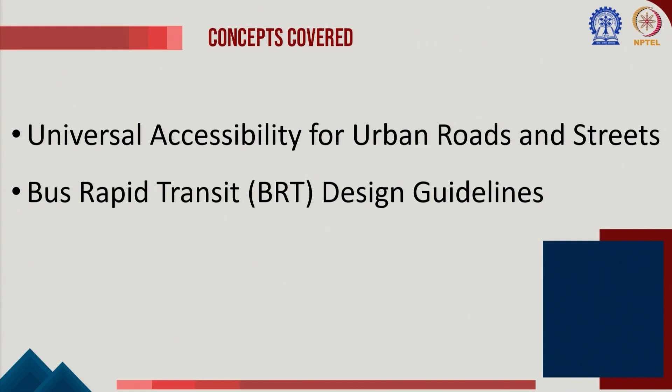Universal accessibility for urban roads and streets will be the first topic covered, followed by the general design guidelines for bus rapid transit, or BRT.

What are the barriers to public transport? Why are people, particularly those with vulnerability, sometimes scared of availing public transport? If we want to make the public transport system accessible, safe and inclusive, we have to understand the different categories of barriers, particularly to the transportation system.

There are certain spatial barriers which include the distance to be covered. If it is too much of a distance, involving a long travel time, then people are more reluctant to use public transport system.

Or if the nearest stop or place from where you can access the public transport is too far from someone's house, such that they have to travel a lot to access that system, that might also be a deterrent. We now talk about this endpoint connectivity, last mile connectivity.

What does that mean? That means it has to be accessible from the origin to the destination.

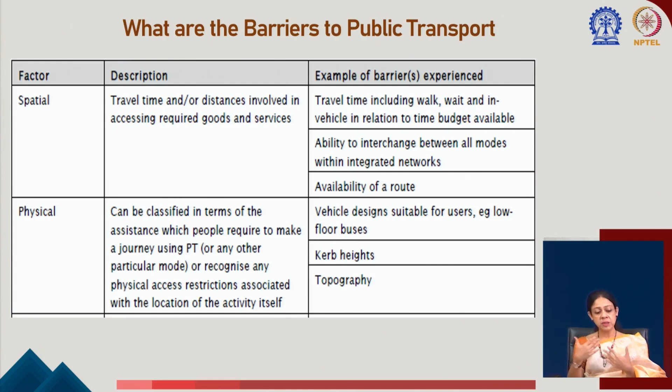Next will be the physical problems. The vehicle design needs to be suitable for someone with physical or sensory vulnerability, like low floor buses or tactile signage. These are the physical barriers, physical restrictions.

Next there might be temporal problems. What are the temporal problems? Non-availability of transport system in certain hours, frequency is a problem, meaning reliability is sometimes an issue, too much waiting time, and scheduling. So these are certain temporal barriers — there may be a mismatch between the time when a service is desired and when it is available.

Next you have the financial barriers, that is the affordability part. The travel cost may be too high; those modes of public transport which are relatively safer and more accessible are not very affordable. So that is a financial barrier.

There might be some environmental barrier, such that it might not be comfortable. The waiting area might not be comfortable, there might not be adequate street lighting, leading to safety and security related issues. There might be a dark patch when you get down from one transport system and move to another. So these are certain environmental barriers related to the quality of facilities.

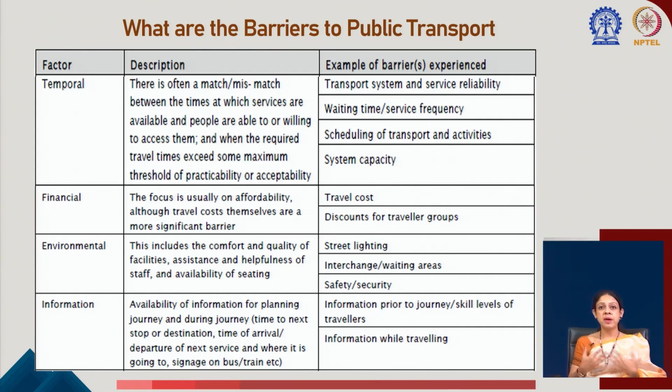Next, information. When we travel from one place to another, the problem doesn't only start when we board a vehicle, but actually before that — when we start planning, when we start getting information, say when booking a train ticket, or wanting to know the frequency of a bus or the bus routes. If that information is not accessible, that leads to problems. Or when someone is waiting at a bus stop, they need to know which buses will be coming there, and whether they are standing in the right place to board the right bus. So these are certain problems related to information.

To summarize, components of accessible public transport are: getting to the service by self, by walking or by wheelchair; getting to the service by car, meaning someone should be able to park and easily transfer to the stop; and waiting for the service, meaning the bus stop, shelter, or train station needs to be accessible.

Then being on board, be it a bus or train, what are the facilities available there - whether it's the vehicle design part or the station and stoppage design part. So both need to be accessible.

Also while being on board, what services are extended there - like how would a person with sensory impairment, a person with vision disability, know that a stop is approaching, or if there is an announcement that the next station is this and the door opens on the left, how would a person who cannot hear be aware? So going back to universal design principles, dissemination of information should be in different forms.

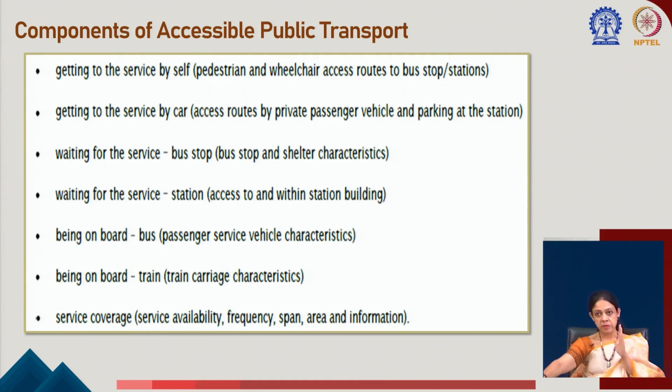This is a comprehensive approach. There are three critical parts of a journey. When we talk about accessibility, there should be seamless accessibility - a point of origin and a point of destination. There should be seamless, uninterrupted accessibility from the point of origin to the destination, from home to office, home to healthcare, or from one place to another. So there's connecting the route to the transit terminal - when you move from origin or destination to the public transport - and then the public transport part itself. These are the three critical parts of a journey, and one by one we will look into the accessibility requirements for each.

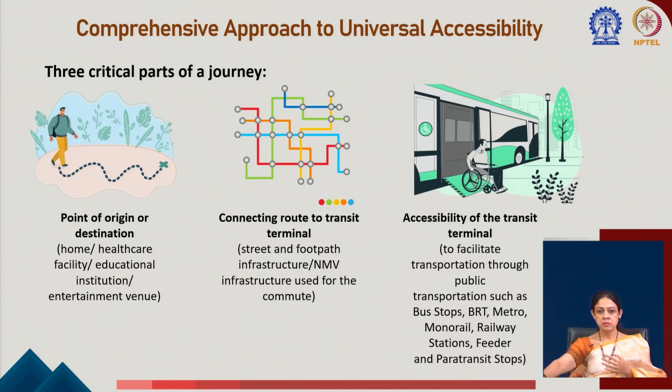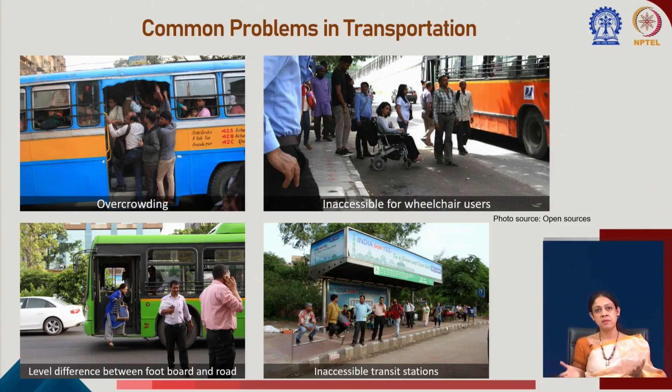These are very common scenes, common problems in transportation - an overcrowded bus, someone waiting on a wheelchair who cannot board, level differences between the footboard and the road when it is too high, and inaccessible bus stops with no seating, no proper lighting, forget braille signage and other things. This is a very common scene in many Indian cities. Things are definitely changing, but situations like this still exist.

Now why do we need universal accessible transit? If you remember what we discussed - individual benefit and community benefit - if someone can avail public transport, that reduces the cost of living because it's cheaper, and it increases his or her potential to participate in different activities including employment. That again goes to a community benefit. So these are the reasons why we need universal accessibility.

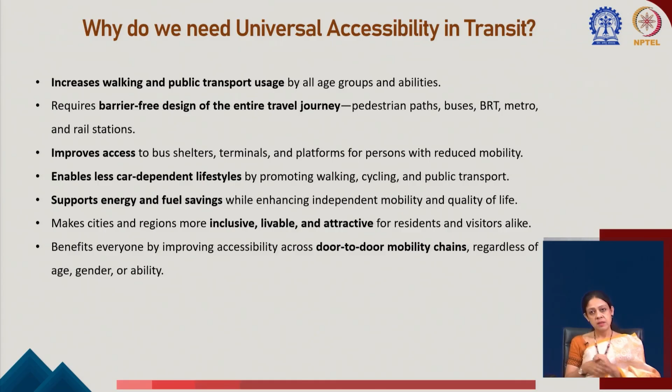Also from an environmental point of view, we know that the pollution created by traffic is quite high, and if we have good public transport systems, that means there will be less automobile dependency - less dependency on individual cars. This less car-dependent lifestyle will have a positive impact on the environmental scenario as well, and supports energy and fuel savings. So these are the overall benefits.

Now how do we achieve this? There are multiple stakeholders, and we need to involve all of them - service providers, planners, drivers and helpers of the transportation system, bus drivers, conductors, auto drivers, everyone. So not only is planning important, but awareness generation is also important. And what is important, as we have discussed, is accessibility audits and walkability audits. These are also important - only then can we have a holistic framework.

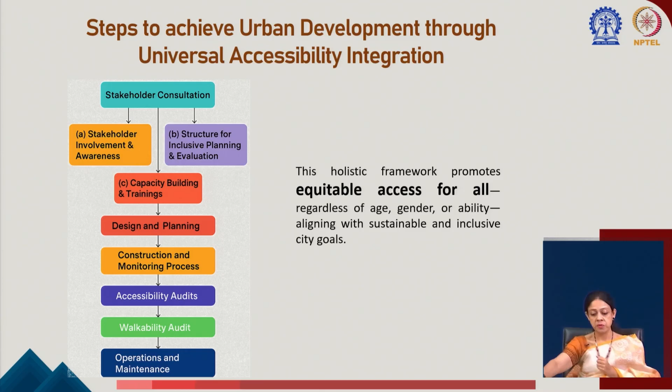Now let us take these one by one, starting with non-motorized transport. When we talk about non-motorized transport, we mean a significantly smaller route - mainly the portion of the travel chain when you go from the origin to the public transport, or from the public transport to your destination. This means it is either by walking, by cycles, or by wheelchairs.

If we talk about inclusive cycle tracks and non-motorized transport, we come back to the environmental aspect - cycles, tricycles, cycle rickshaws, push carts, these are all human-powered modes. In many of our cities, these tricycles, special cycles for people with disability, cycle rickshaws which are popular with the elderly to keep their pace, and push carts in tier 2 and tier 3 cities, are used for last mile connectivity.

All these human-powered modes - their safety is also important. Whenever we have a segregated lane for these non-motorized vehicles, physical separation is desirable, at least notional separation. Physical separation is very important for safety. A well-defined cycle track for non-motorized vehicles, properly separated with dividers or bollards from the vehicular road, is essential for inclusive non-motorized transportation and proper integration of these vehicle categories.

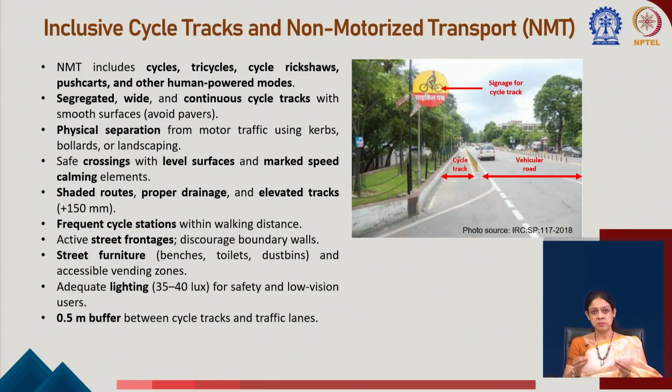This is a typical section of a cycle track, taken from the IRC. The sources are given, and these reading materials will also be provided to you, where we see a properly divided median track, a dedicated cycle lane, and a vehicular road with proper on-street parking. So everything is well defined, and there are also frequent access points with ramps.

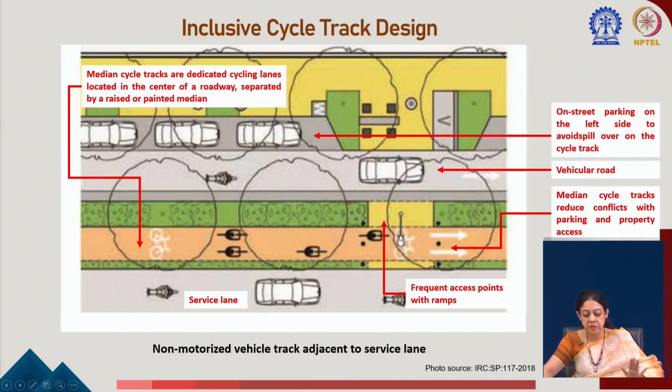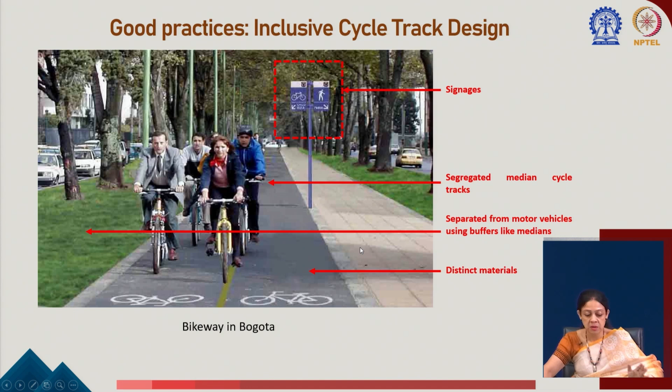Proper signage is a good practice - a distinct material to show which is a walking place and which is a cycling track. Now let us get into some motorized transit system.

To start with, inclusive bus stop design. In the bus stop, what do we do? We access the bus stop from the footpath or the road - let us try to imagine how we use it. Next, we need to access the vehicle, for which we require a smooth transfer from the stop to the vehicle.

So stage one is a smooth transfer from the footpath or road to the stop, then stop to the vehicle. Between these two, there's waiting time - if it's long, you're waiting a long time at the bus stop or terminal. While you wait, you avail information through different means - information on which bus is to come, and when it is to come.

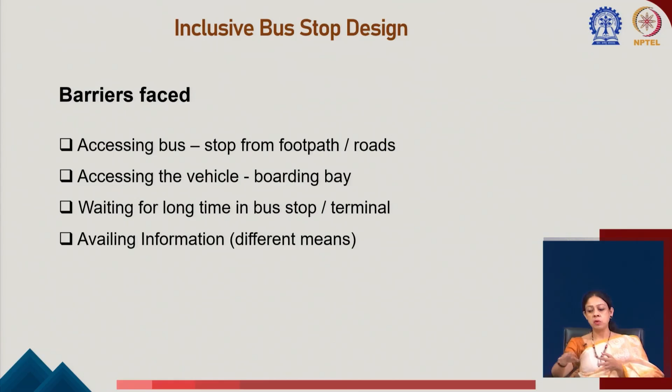So what are the solutions? When you access the bus stop from the footpath or road, level access is required. Where level access is not there, access to a ramp is needed, and curb ramps are required when there is a small difference.

For accessing the vehicle, there is the concept of a boarding bay which is at the level of the bus. For seating at the bus stop or terminal, there are priority seats. If someone is there with a wheelchair, then a square space of 1.2 meter by 1.2 meter is needed for placing the wheelchair.

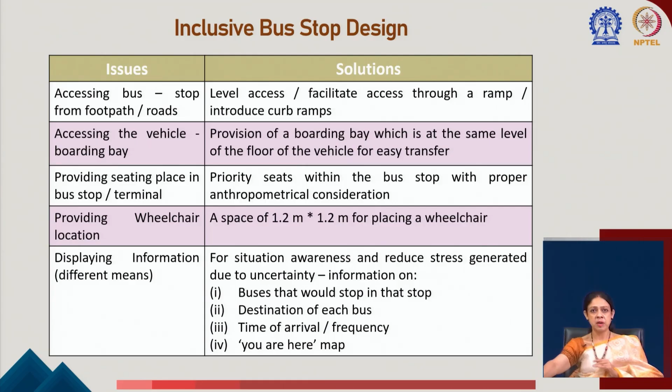Displaying information through different means is part of situation awareness - buses that will stop at that particular stop, destination of each bus, time of arrival, frequency, and maybe a 'you are here' map so that you can orient yourself to the surrounding.

I think the same thing I discussed is being mentioned here. Additionally, there should be anti-skid matte finish tiles, because many of these areas are vulnerable to getting wet from rain, so it needs to be safe from that point of view. Choice of material should avoid glazed vitrified tiles and granite or polished Kota stone, because they can really be dangerous. Also needed: tactile guidance, and shelter against sun and rain, with proper lighting.

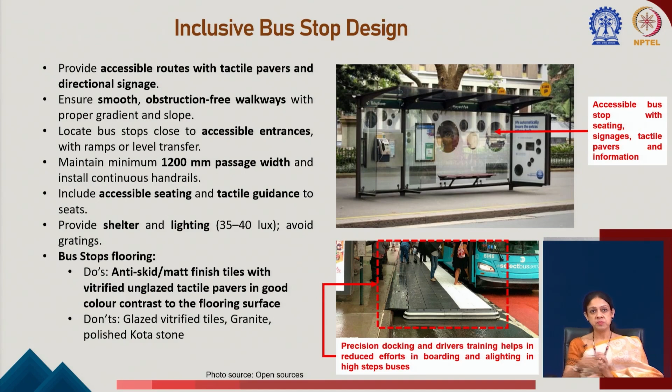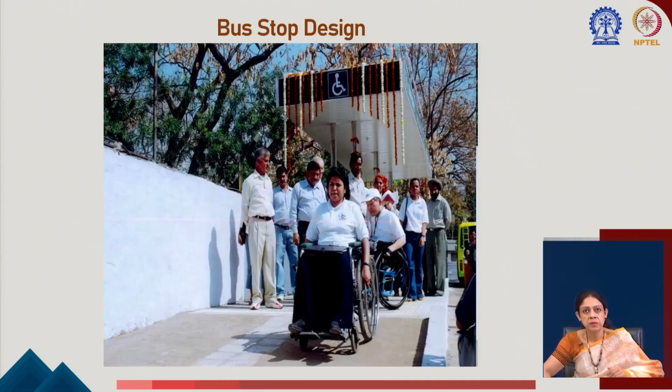Sorry, yeah. This is a design prototype which we had developed at IIT once, and I wanted to share that with you. So, what are the components here?

It is the proximity to the barrier free parking area, easy access from the parking area, from the barrier free parking with the help of the ramp to the bus stop. There are seating places, and there is a 1.2 meter by 1.2 meter area which is reserved for the wheelchair, and this is the boarding bay number 7, from where the bus can be accessed.

And this is a marking where the bus should also know where to stop, so that it can align itself to the boarding bay. So, this is the bus stop, and the suggestion was that some of the bus stops can have a universally accessible toilet along with a water dispenser, and also proper information with this information board. We have some views also, you will see. So, these were some of the components which were proposed in this prototype.

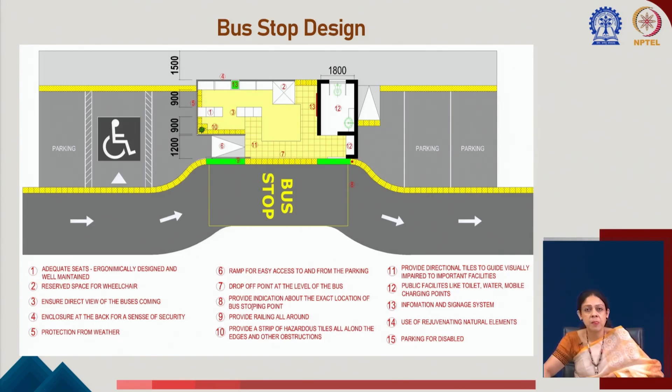Something like this, that this is the ramp, this is the signage system.

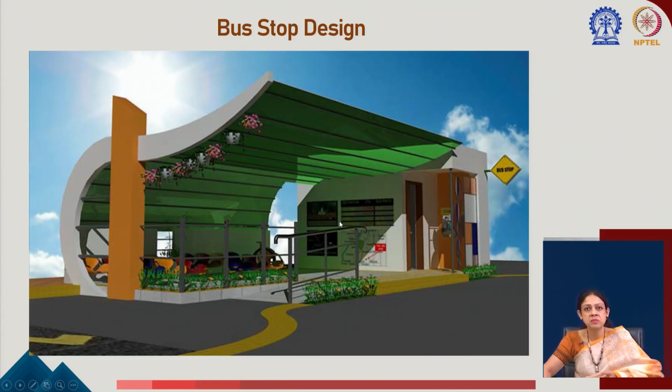This is also another very simple one, where you can see that these are the boarding bays, which are being marked by this directional and hazardous tile, and the rest of the areas have railings put, so that there is no dangerous situation.

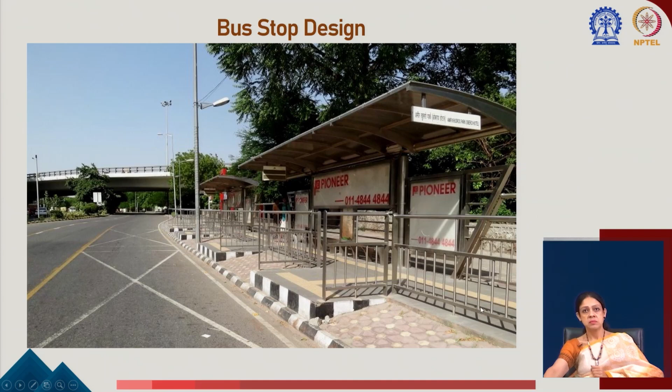Yes, as you can see, there is a very dedicated and clearly marked bus lane, where the bus should stop, because you need to synchronize things. You are having a boarding platform somewhere, and the bus is stopping somewhere else, then it doesn't make sense.

And also, you cannot expect the bus driver to see while driving the bus, where is your boarding platform. So, you have to mark a dedicated place on the road, from where it can be accessed.

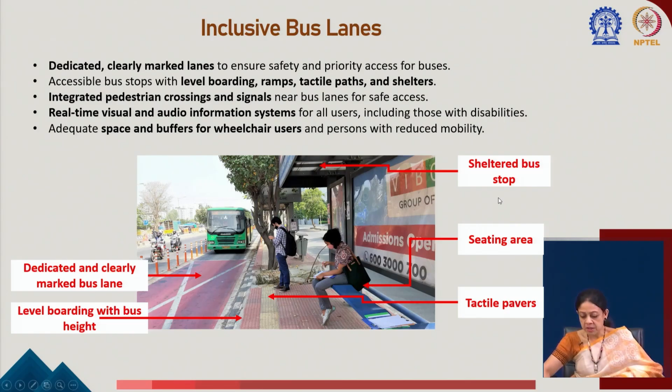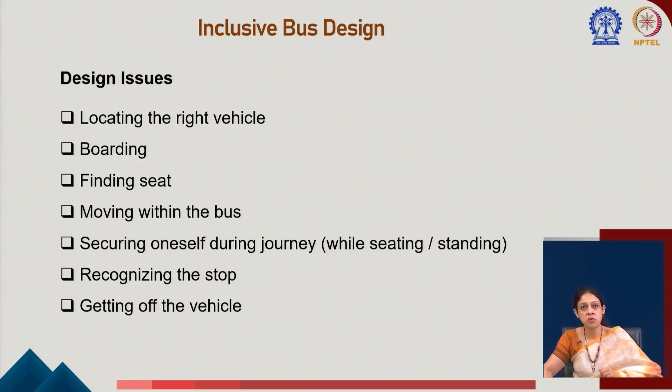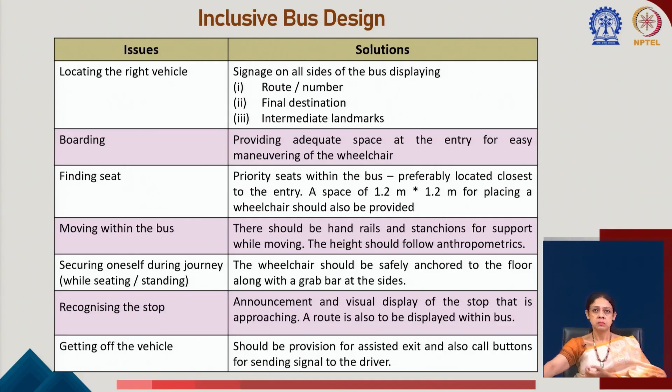Low floor entry, and additionally a ramp, space for wheelchair, sliding doors, wider doors. These are becoming more and more common.

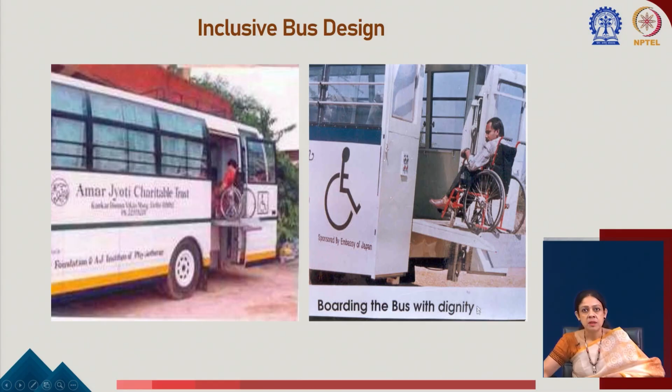High contrast handrails. Some earlier prototypes experimented with a lever operated ramp, but what works most is a simple ramp like this, which is simply hinged, easiest to operate, and doesn't go wrong.

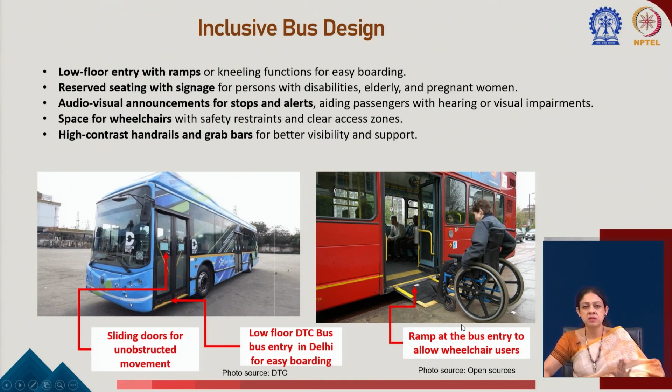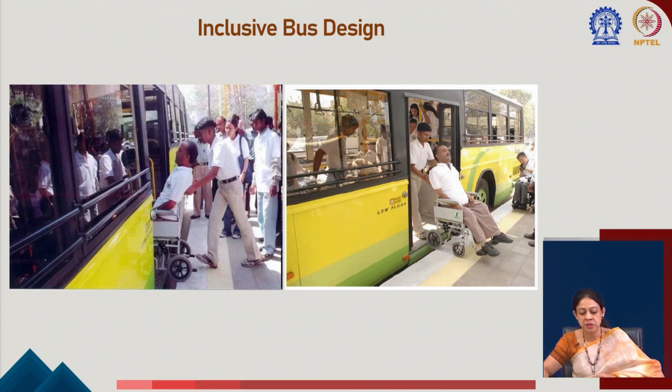Generally, this kind of transfer is possible from boarding bays if you have a low floor bus, easy transfer is possible. But the problem with our system is that we are gradually modifying it, so not all bus stops are barrier free, not all buses are low floor. When there is a mismatch, you need innovations like this hinge opened ramp, opening with the help of a hinge. Also within the bus, call buttons are located at significant intervals for sending a signal to the driver.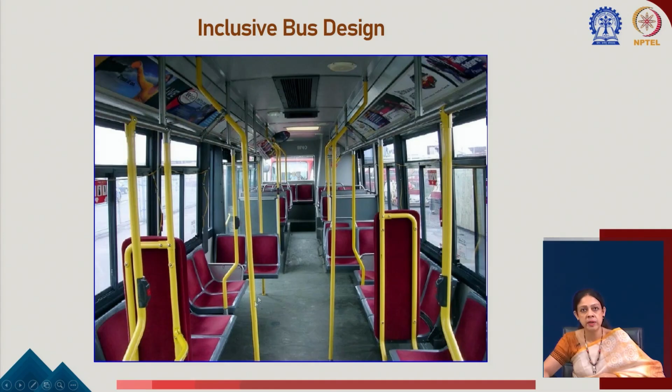Inclusive taxi and auto rickshaw stand: hinged ramp for accessible taxis, with hinged ramp and retractable steps for senior citizens. Accessible routes with guiding pavers, proper illumination in the auto stands, because not everyone can afford to hire an accessible vehicle with a hinge ramp. We have to do something for every category of people, at every level. We cannot say that only people with vulnerability will be availing these. So even auto stands can be made as accessible as possible with basic things like lighting, cleanliness, giving level access to the platform and to the footpath. Not every solution needs to be very high tech.

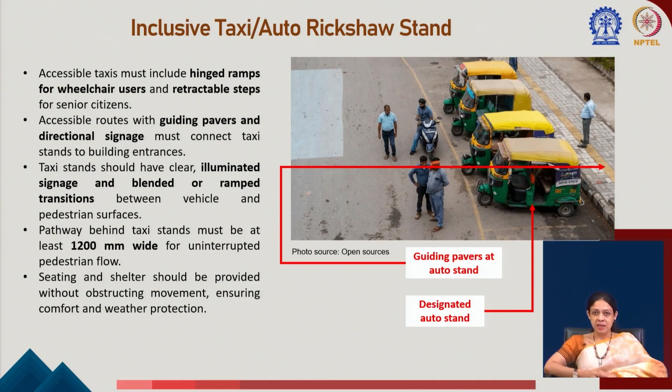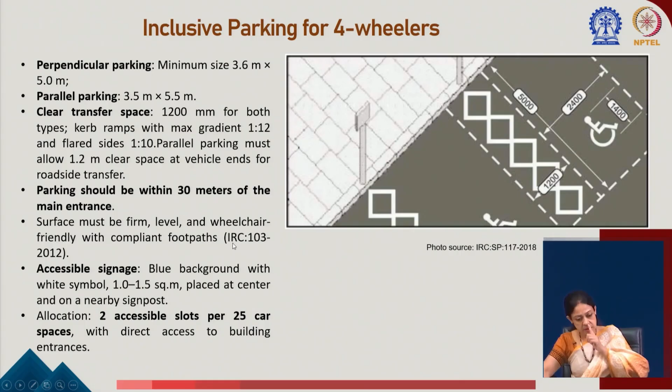Inclusive parking, we discussed this while talking about the internal environment, but just to repeat, inclusive parking spaces are essential wherever we have this near the public transport system.

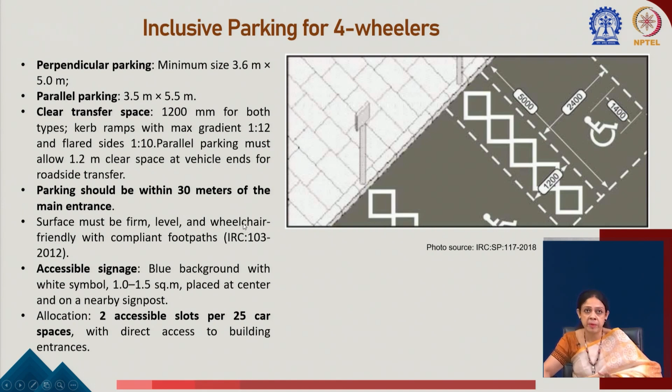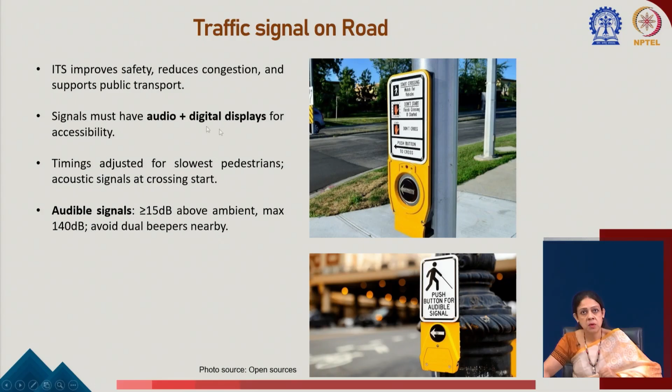Traffic signals on road for improved safety, reduction of congestion, audio digital display, audible signals. To summarize, we need accessible infrastructure, accessible information systems comprising real-time visual and audible travel information, access to transit terminals and stations, proper high contrast, large print signage and intuitive icons for non-readers. Simple thing - if we are in a place where we do not know the language, we are stuck. Low height ticket counters for wheelchair users and short statured persons. If you remember when we discussed categories of disabilities under the RPWD Act, dwarfism has been included there as a type of vulnerability, so low height ticket counters are for them as well, not only for wheelchair users.

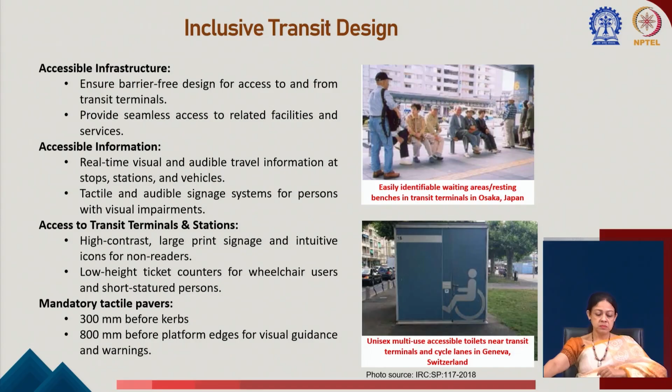Mandatory tactile pavers. Now, the BRT, the bus rapid transit system - this has got very elaborate guidelines because it is relatively newer, covering the placement of lanes, the location of stations, very precise docking and level boarding platforms, ramps, handrails, and the provision of modal transfer from one to another. These are the IRC BRT manual guidelines which can be referred to. It's not possible to discuss the entire manual, so just some highlights I am going to show.

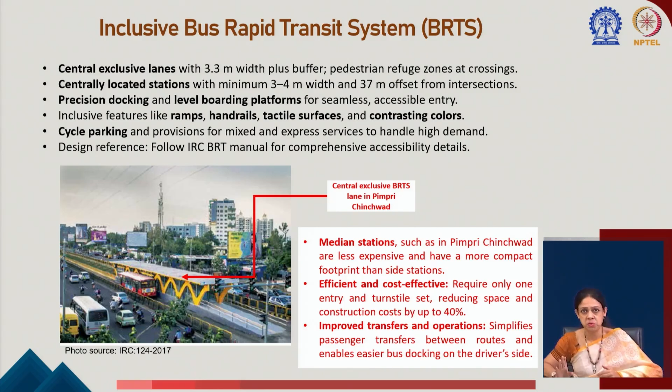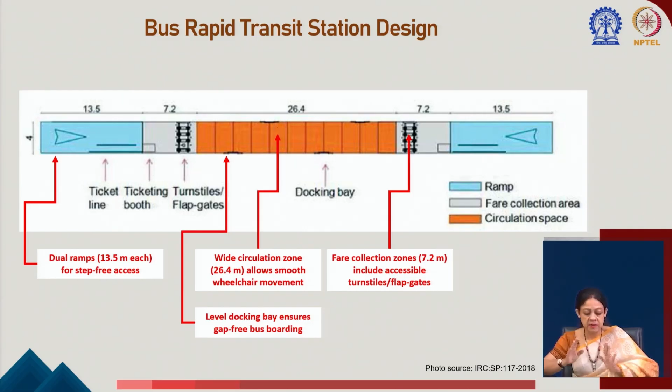Like this - dual ramps for step free access, a long docking bay with proper circulation spaces, and the fare collection area, everything at one single level. These level docking bays ensure direct access without any gap - what they call gap-free bus boarding, like this. This is the general situation where, wherever there are stations, with proper shades, there is a direct transfer. This is how it's integrated. Now BRTs, whenever they are being laid, are following these standards right from the inception.

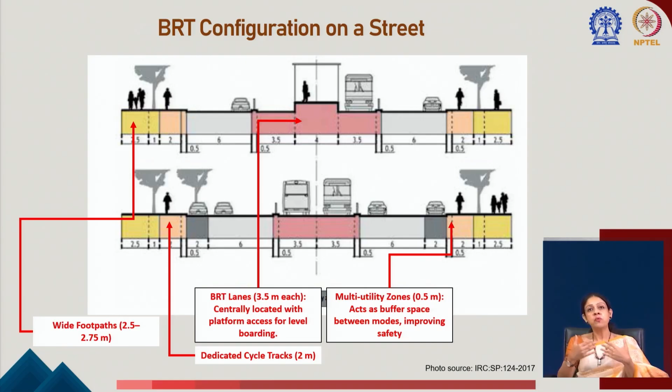But the challenge is when you are trying to make the existing system of city buses and bus stops accessible - there you have to go for retrofitting solutions. These are not really rocket science, just simply raising the boarding bay within a bus stop can easily solve a lot of problems. You just need to know how to go for these very easy solutions.

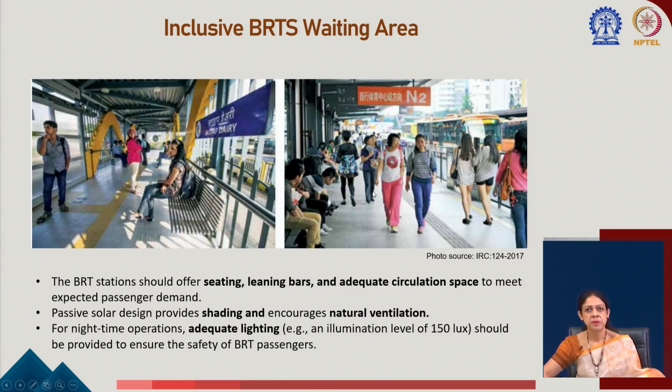Inclusive waiting areas with proper seating facility, well planned with proper leaning bars, adequate circulation space, shading, lighting. We have some good practices - level boarding platform, tactile paving. These will be shared with you. This is just a repetition of what we said, the features are there just to give a visual idea.

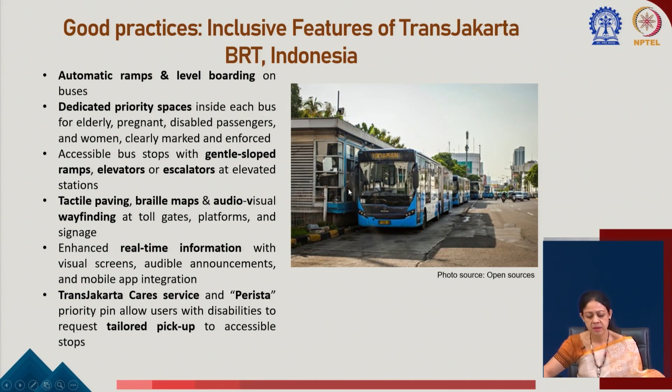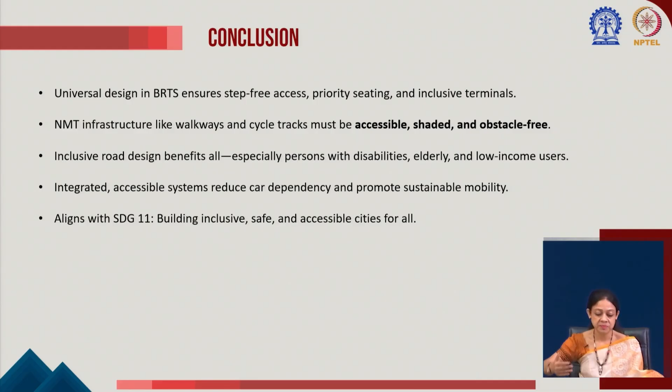So here we conclude that universal design in BRTs ensures step-free access, priority seating and inclusive terminals, accessible, shaded and obstacle-free walkways and cycle tracks, which benefits all. It's an integrated accessible system which reduces car dependency and promotes sustainable mobility, and aligns with the Sustainable Development Goals. We have discussed the national and global vision towards this sustainability - SDG 11, Sustainable Development Goal 11, talks about building inclusive, safe and accessible cities for all, and this is also being taken care of by these BRTs.